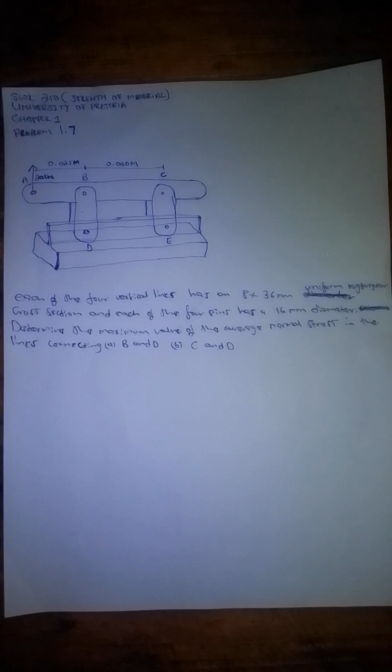Today we're continuing with our SWK 210, which is the strength of material from the University of Pretoria. We continue with our chapter 1, and today we're looking at problem 1.7.

There's a sketch right there, and the question says each of the 4 vertical links has an 8 by 36 millimeter uniform rectangular cross section, and each of the 4 pins has a 16 mm diameter. Now the question is, determine the maximum value of the average normal stress in the links connecting (a) B and D, and (b) C and D. So let me just explain and show you guys the 4 links.

This is the first link, and behind there's actually another link. This structure you see, I call this, like this sort of a beam you see here, it's actually seated between 2 links, exactly the size. One here as you see it, but the one you can't see it, I just drew a line here to show that actually behind it there's another link, so it's seated behind it, and it's actually held together by a pin here, and exactly and that happens again also exactly here.

There's one link here, another one here, and then they are held by a pin. Now what's happening here is exactly also happening here. There's also another sort of a beam here, and it's seated between these 2 links. It's also held by a pin here and by a pin there.

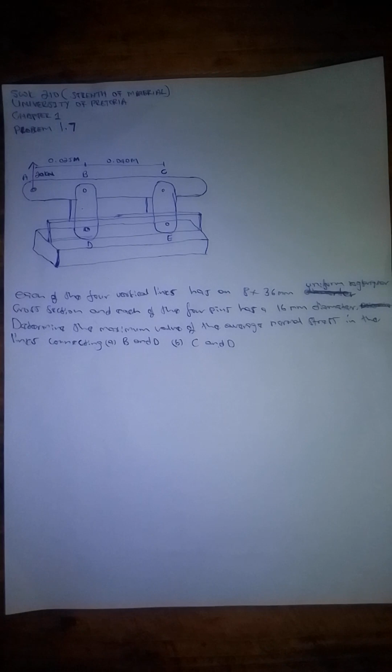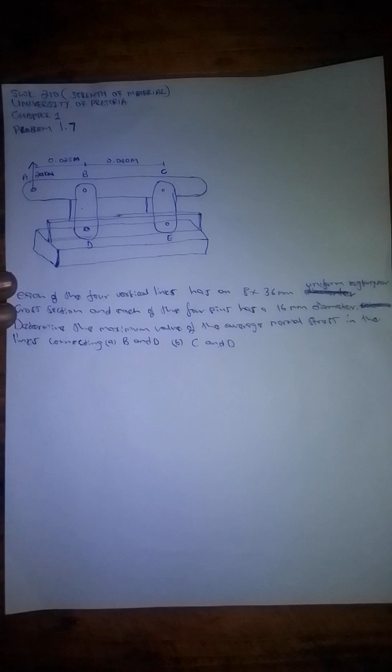So now with that said, they say determine the maximum value of the average normal stress in the links connecting B and D and also connecting C and D. So we're going to calculate the average normal stress in these links, the links connecting B and D. On question A, we're going to calculate the average normal stress in the links connecting B and D. And then in our second question in B, we're going to calculate the average normal stress connecting C and E.

Now, for us to move further from here, we have a structure there. Now we need a free body diagram. So I'll just draw one here. Okay, I forgot to mention here that at this point, there's actually a 20 kilonewton force that is applied upwards at this point. So when we have that, then this will be our 20 kilonewtons.

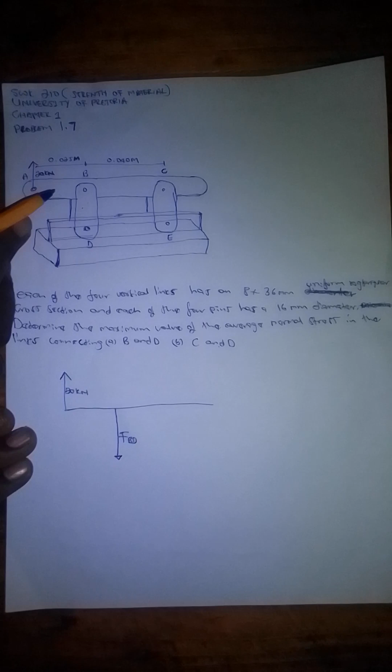And the B and D, I'll just put it like this. I will explain later. So this will be our force in BD. Yeah, this is force in BD because remember, these are held together. When you push here, there will be a force applied here, and also there will be a force applied there. Now with that said, we can just put another force here and say it's force CE. So now we have our 3 forces there.

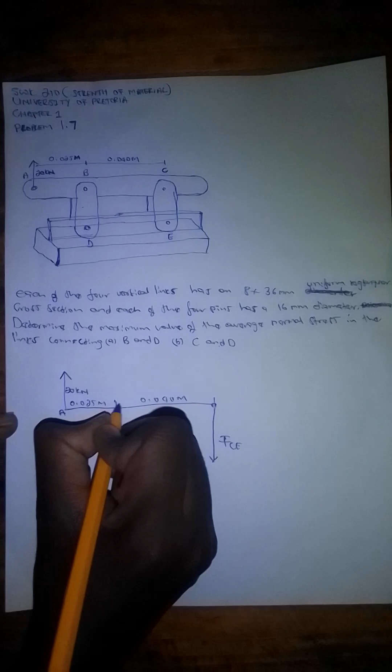Then we just also put the measurements. There's 0.025 meters, so it's gonna be 0.025 meters, right? And from here to there is gonna be 0.040 meters. So that is almost our free body diagram, or let me just name it A, B, and C, right? So yeah, that is basically our free body diagram.

Now when we have our free body diagram in this way, normally, or the easiest approach for us to be able to determine the maximum normal stress, we know we're gonna need the forces, right? If we're going to calculate the average normal stress in BD, we're gonna need FBD, right? So the first thing we're going to be doing now is to calculate FBD.

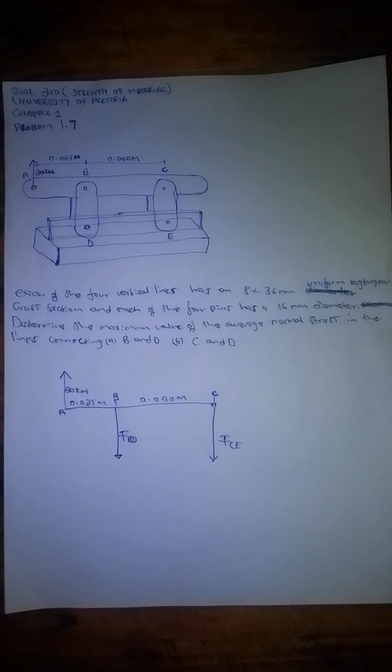And for us to do that, it's easier for us to calculate the sum of all the moments at point C. This is typically, I think it's SWK 122 work, where we know that we have two unknowns. So if we calculate the sum of all the moments here, we're going to eliminate FCE, and we're going to have a known force and an unknown force, and it's going to be easy for us to get that.

So with that said, we can just say, therefore, sum of all the moments at C is equals to 0. Now, if sum of all the moments at C is equals to 0, therefore, BD from here, from B to C is 0.04. So we're just going to say 0.04 multiplied by BD. So it's going to be, and remember, another thing I need to highlight is that if it's anti-clockwise, it's positive, and if it's clockwise, it's negative.

So with that said, from the FBD, if we take the moment by C, it's going to be anti-clockwise, so that makes it positive. So we're going to have 0.04 multiplied by FBD. Now with that said, we also need to calculate the moment of 20 kilonewtons by point C.

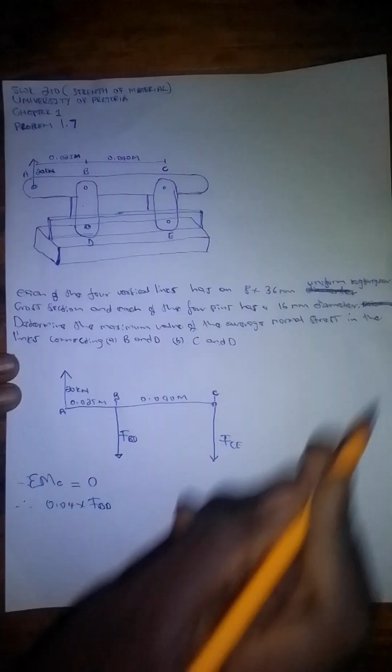Because when you look at the 20 kilonewtons, it's going clockwise, so it's negative. So we're going to say minus 20 times 10 to the power 3, that is the force, multiplied by the total distance, so you can just say 0.025 plus 0.04. And all this is going to be equals to 0.

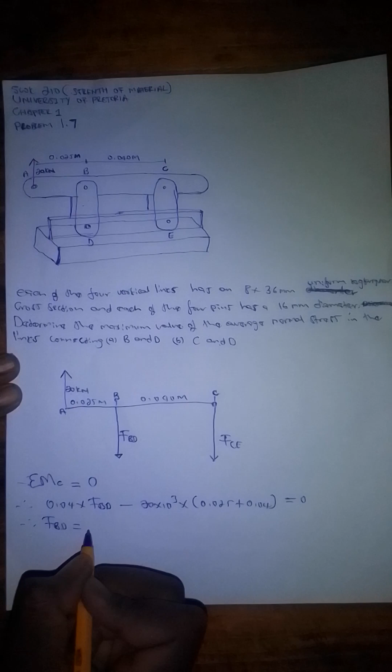Now with that said, there's only one unknown, which is FBD. So if you do your calculations, you'll find that FBD is equal to 32.5 kilonewtons, so that's 32.5 times 10 to the power 3 newtons. So that becomes our FBD.

Now we got our FBD because we took a moment by C to eliminate FCE. But now we need FCE, and to get that easily, we can eliminate FBD by taking the moment by B. We could also take a moment by A, but it will be much more straightforward if we take a moment by B.

So we say the sum of all the moments by B is equal to 0. We can start with the 20 kilonewtons, which from here is going to go clockwise, and that makes it negative. So we're going to have minus 20 times 10 to the power 3 multiplied by the distance from A to B, which is 0.025.

Now do the same with FCE. It's also going clockwise, so we're going to say minus FCE multiplied by the distance from B to C, which is 0.04 meters. So all this is equal to 0, and we only have one unknown. If you do your normal arithmetic simplification, you'll find that FCE is equal to minus 12.5 kilonewtons.

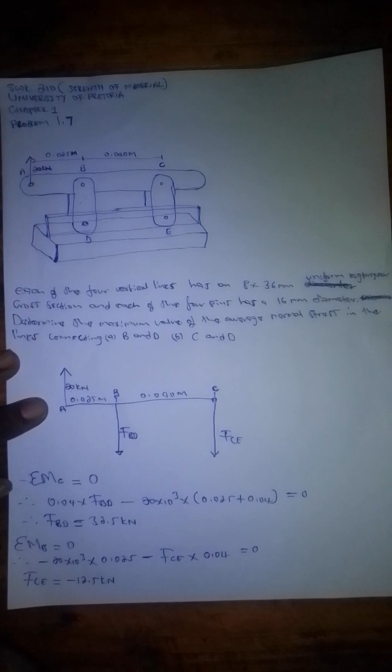Another thing I need to highlight here is that we need to remember these two links can either be in compression or in tension. One thing that tells us whether a link is in compression or tension is the sign of the force. So now FBD is actually positive, and if it's positive, that means link BD is in tension, because the force in BD is actually positive.

So I can even write it here and say FBD is positive, just so that it can be visible. Also now FCE is negative, which tells us that link CE is actually in compression, because of the sign. So I can just say here that link CE is in compression, and FCE is negative.

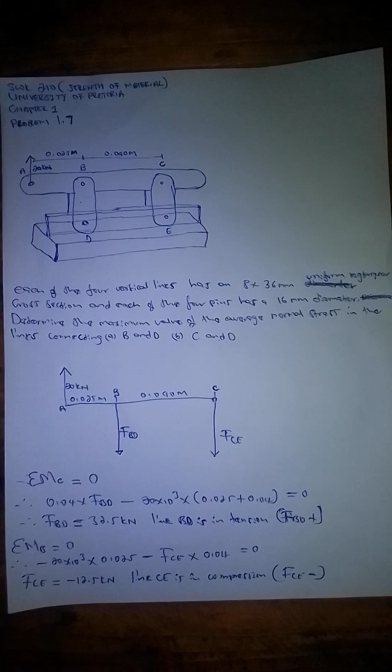So now this is the first part. We are done with the first part of our question where we calculated the forces. Now we are almost halfway there. Remember, the question asks for the average normal stress, and we know the equation of stress is actually force over the cross-sectional area. So now what we need is to calculate the cross-sectional area, which is very important and very interesting, especially the part I'm going to be explaining.

So now we're going to start with link BD and calculate the cross-sectional area. So we can say cross-sectional area of link BD is equal to, I just needed to write that sentence there. I could have easily said area is equal to, but I wanted to write it that way.

Now I need to explain something here. There's a very interesting difference between the cross-sectional area of the link that is in tension and the link that is in compression. So the link that is in tension, let me just write it down and then I'll explain it. We know that's the thickness, and then there's also the length. So we're going to say 0.008 meters, which is the thickness. Remember, we are told that it's actually an 8x36.

Multiplied by. Now instead of using the whole 36 millimeters, we're going to say 0.036 meters minus, this is actually where I need to explain this. Okay, let me just write this properly.

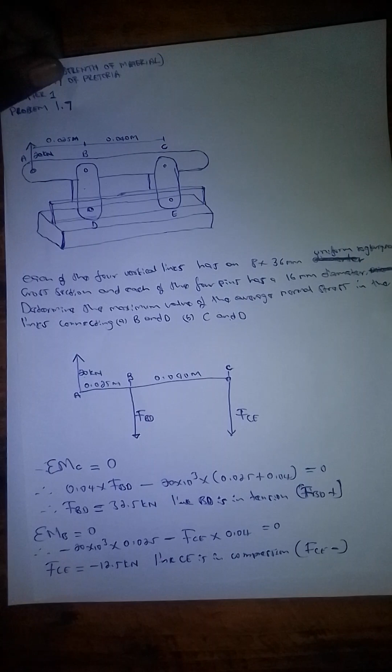Now, when a link is in tension, the cross-sectional area that you're actually using, let me just draw a line here. Remember, the cross-sectional area is the area here. So when a link is in tension, this area that is actually occupied by the link is not counted, which means you get the area from here to here and then jump the hole or the pin from here to there.

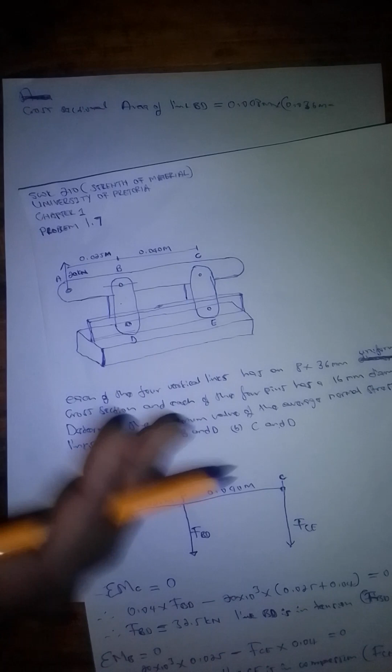This will be clearer when I explain it. When this link is in tension, this pin here is actually pushing upwards, and in pushing upwards... I could easily say when the link is in compression you add this area, and when it's in tension you minus this area. But I'm trying to explain the why part. Why is it that we have to minus that? That's what I'm trying to present to you guys.

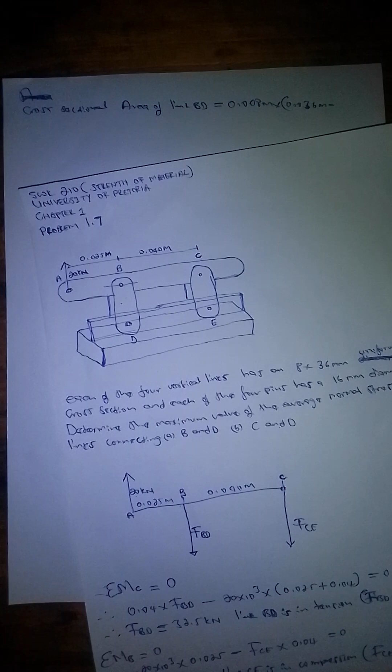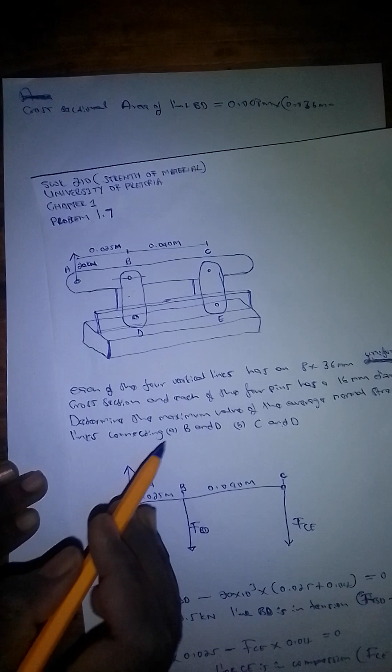This is because practically when this is in tension, the pin is actually moving in that direction. And with that said, only this part and that part is the one that is actually affected. Why? Because remember we are calculating the average normal stress, so the maximum value of the average normal stress, the highest normal stress that this pin in tension can actually take, is the normal stress that this part here can take. I hope that's much clearer.

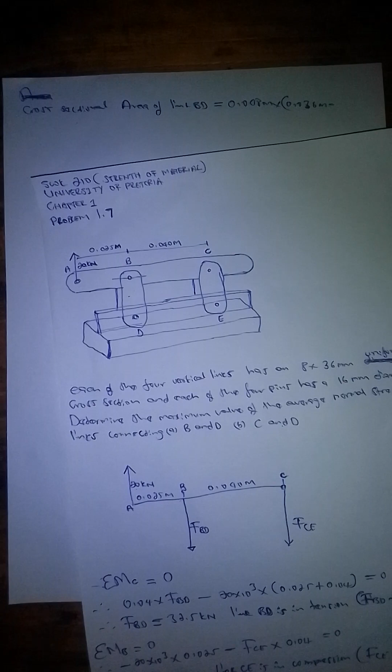This is because if the pin experiences a stress that is actually much higher than this part, it doesn't really matter if this whole part can handle it. As long as it can experience a stress that is higher than this part, then this pin or this link will actually fail. I'll find a much better way of explaining that, but the thing is, when the link is in tension in this case, the area here has to be subtracted.

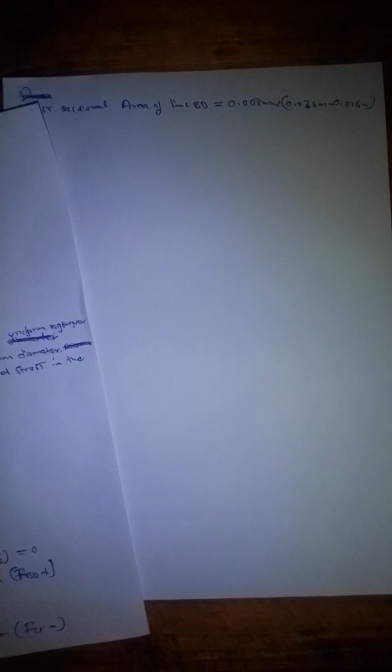Because we know that the diameter of the pin is actually 16 millimeters, we can easily just say minus 0.016 meters. So then that becomes it. And with that said, when you use your calculator, you get 0.00016 meters squared. So yeah, that becomes the cross-sectional area of this pin.

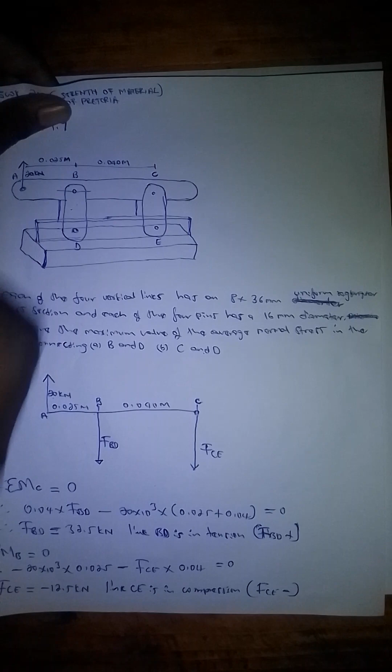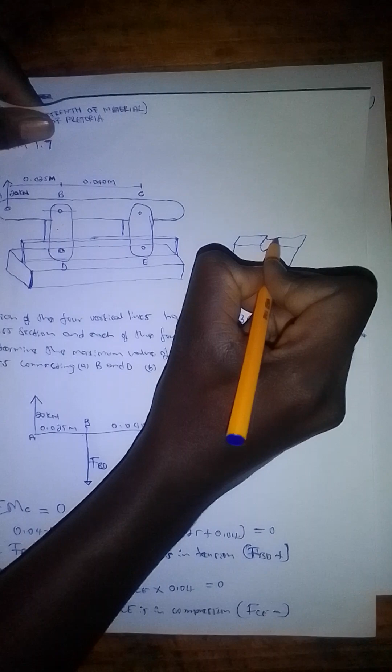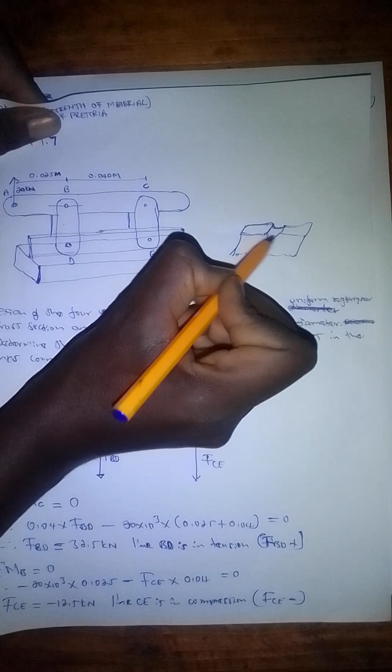Can I just draw it here? Let's say I cut this pin here, right? This is what I'm gonna try to give you like a 3D view. Yeah, this is the pin. So if I cut this pin by half here, I'm gonna be left with this. So the cross-sectional area that is actually being calculated is this area here, excluding the place where there's the pin. And that's why when we calculated the cross-sectional area, we did say 36, and then 8, and then 36 minus this part here, which is the 16. I hope that's much clearer.

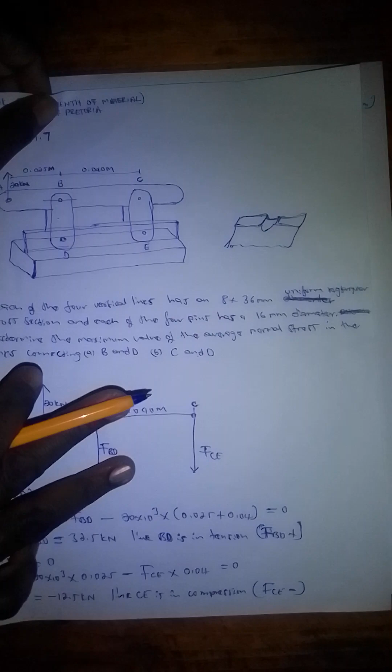But there's more. With time, I'll find a better way of explaining why, because the important thing about this module is knowing the why part of things, not necessarily knowing how to solve it. It's much easier to solve it, but if you know the why part, then the tricky part of this module will actually be much easier.

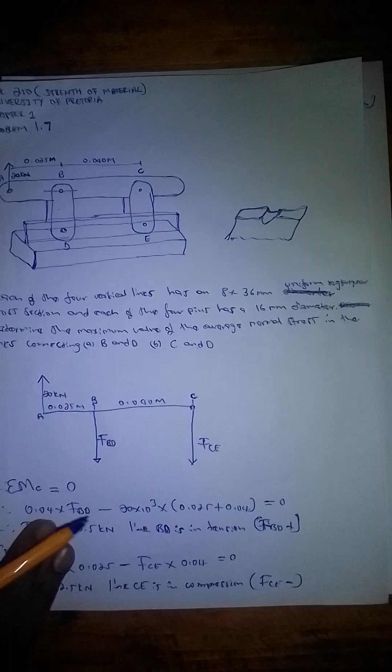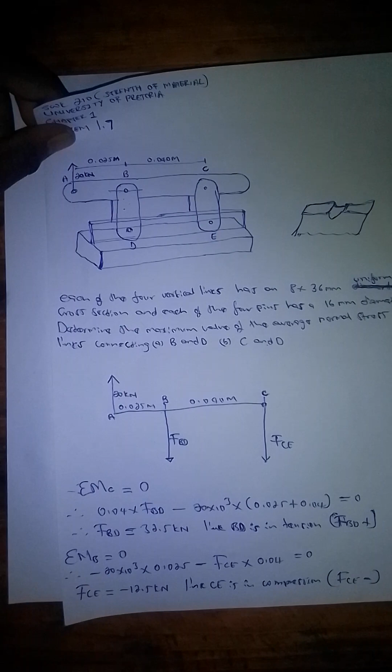So with that said, now when we have that area, remember we calculated that cross-sectional area to be 0.00016 meters squared, but there are two links, this link and the one at the back. The force BD is actually acting upon both links, so the total cross-sectional area that BD is acting on is gonna be twice that. So area for two links is equals to 0.00016 multiplied by 2, which gives 0.00032 meters squared.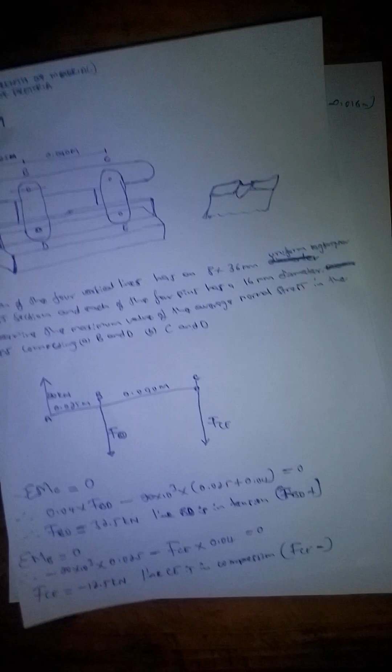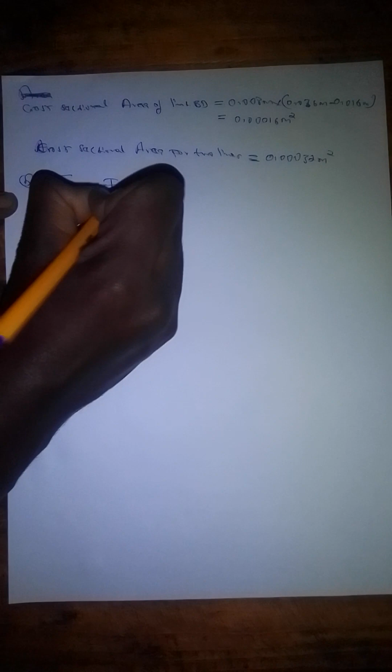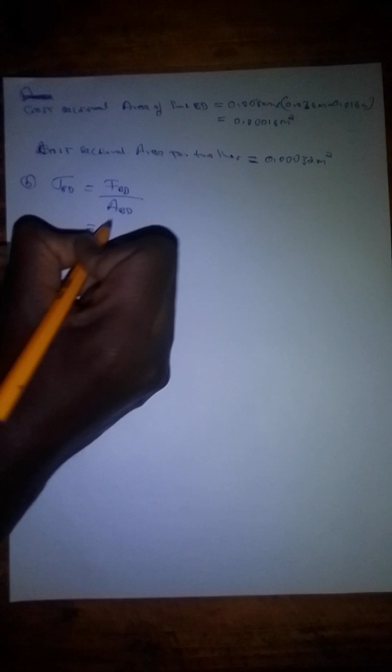Now that we have our cross-sectional area of link BD, which we've already established is in tension, and we have the force BD, we can answer question A: determine the maximum value of the average normal stress in the links connecting B and D. Average stress of BD is equals to FBD all over area of BD. We already calculated the values we need: force BD is equals to 32.5 kilonewtons, so it's 32.5 times 10 to the power 3 newtons, all over the cross-sectional area of link BD, which is 0.00032 meters squared.

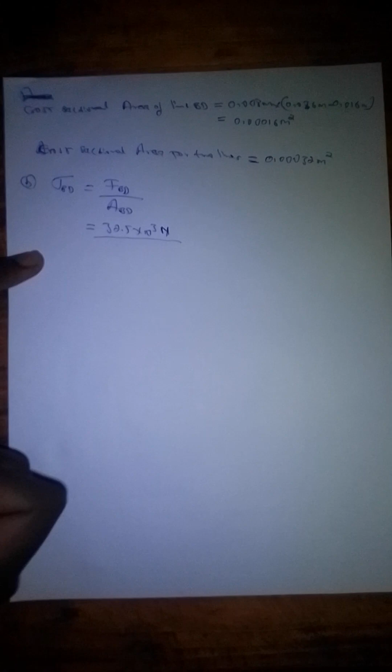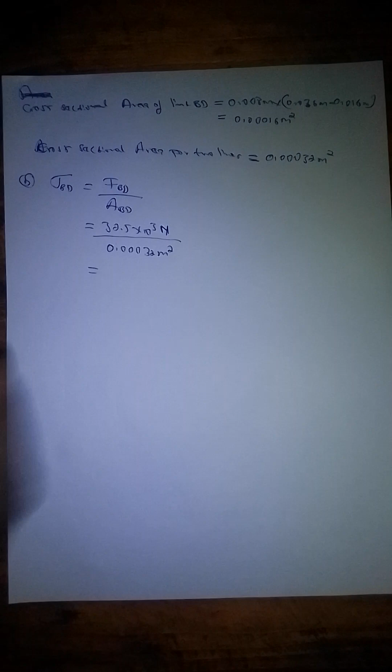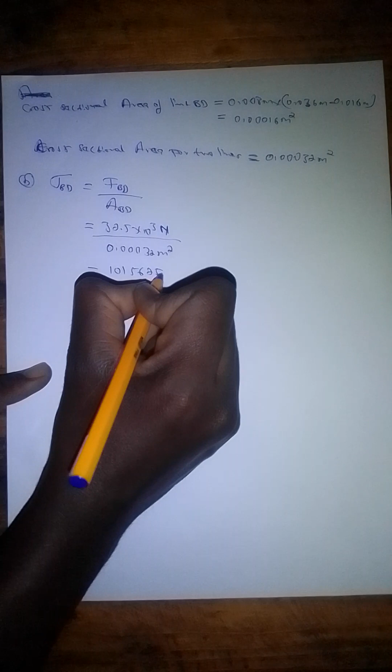Now, if you're going to convert it to megapascals, it's going to be equal to 101.563 megapascals. With that said, we have answered question A of the problem.

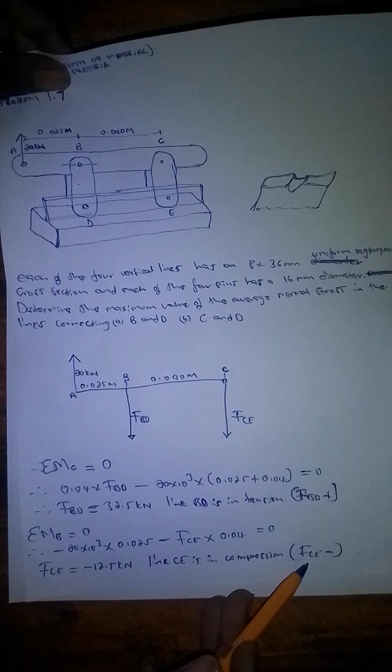So now we're going to question B. Question B is also similar, but now we're going to use the values of CE. Remember, here we only have the force, but we don't have the area, so the first thing we need to calculate is the cross-sectional area of link CE. However, link CE is actually in compression, because we've established that it's negative.

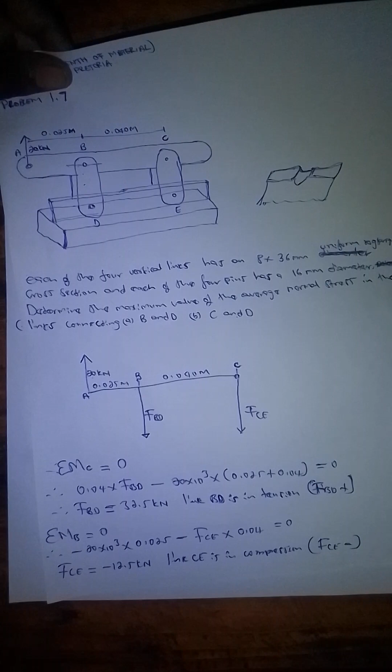Now, when the link is in compression, we use the whole cross-sectional area. So we can say the area of CE is equal to, let me use meters, 0.008 meters multiplied by 0.036 meters. And if you use your calculator, it gives you 0.0000288 meters squared.

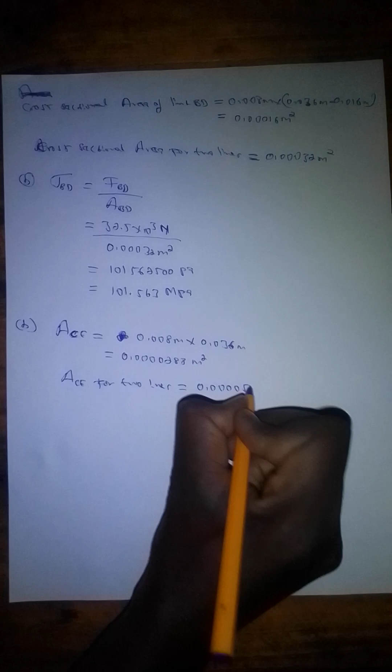However, this is also the same as the first question - this is actually two links: the first cross-sectional area here and the other cross-sectional area of the other link at the other side, because this force is acting on both links. So we can say that the area CE for two links, when you multiply this by 2, gives you 0.0000576 meters squared.

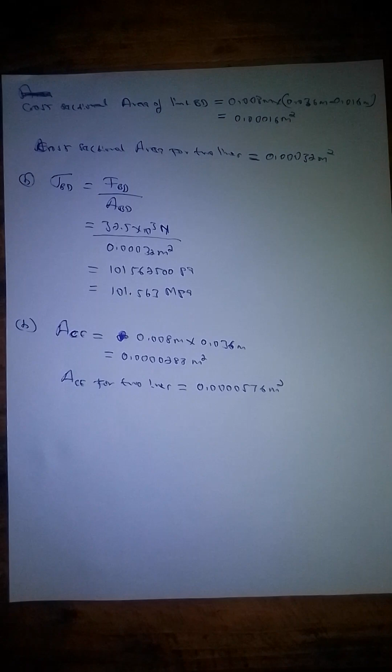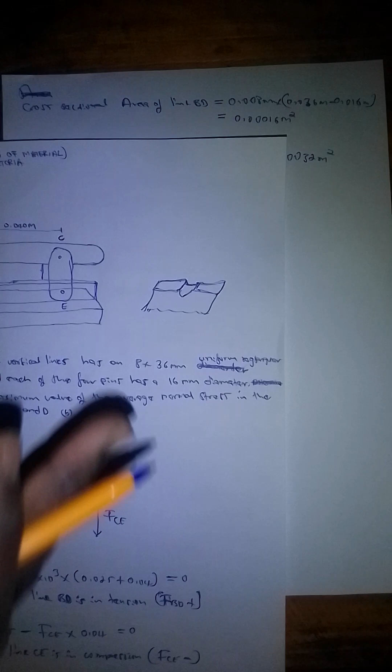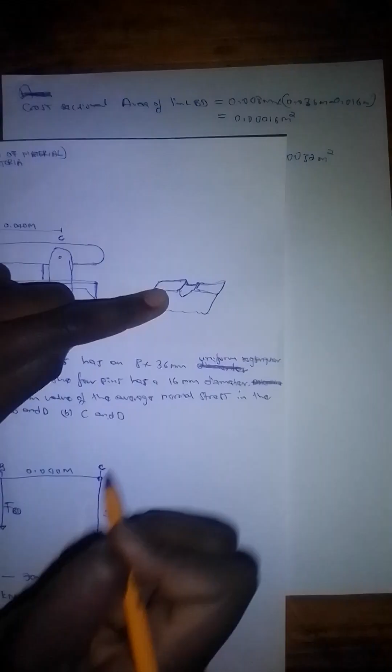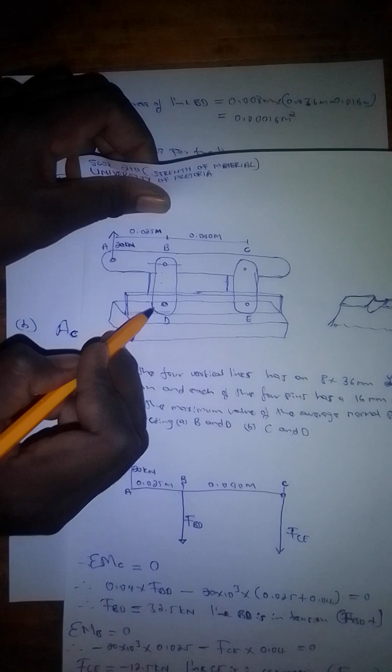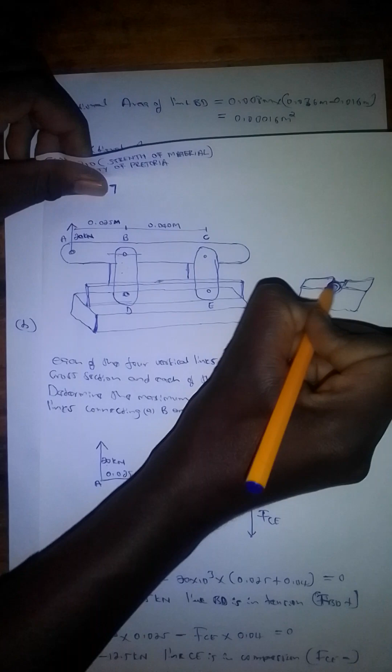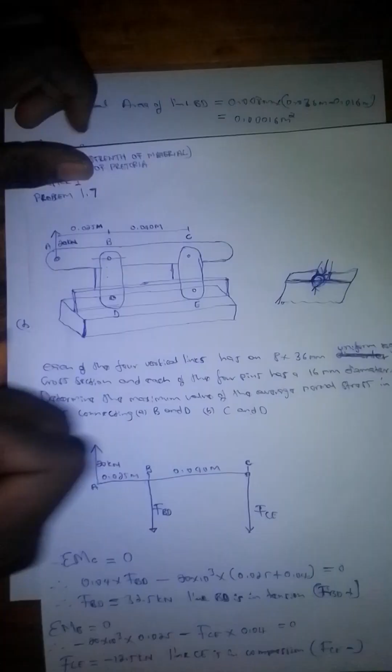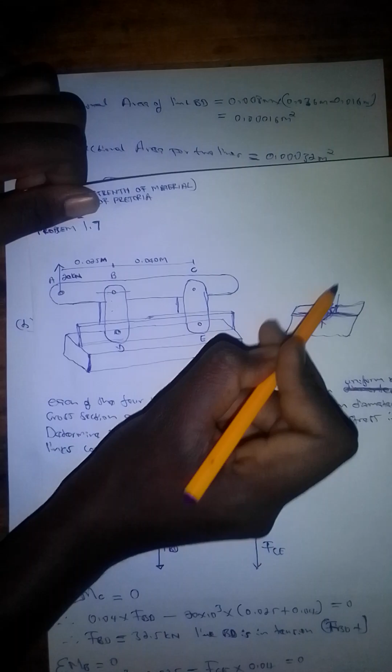However, in compression, when you actually compress this - let me put the pin here. If this is a pin, and you exert some pressure down, there's some force here and some force here too, not just on the link but also on the pin. As such, this whole area here is actually experiencing compression, whereas in the case of BD, only this area was experiencing tension, because the pin here was only held on one side. I hope that makes sense.

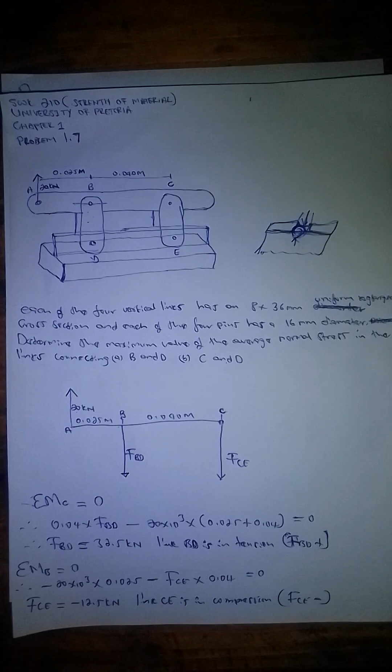This is actually just one of the principles of physics that I believe, with time along this course, will develop. But it's very important, especially because this module is full of tricks in itself. So that's why I always try to emphasize or explain the how part of things, because if you know the how part of things, if in one way or another the module or the question surprises you, you can always find a way through solving that.

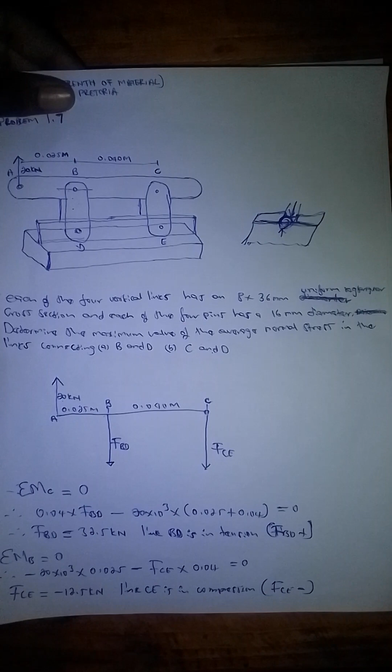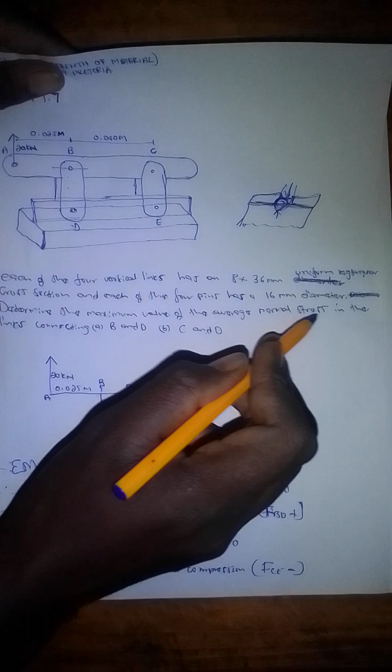So that is it. Now we have established the area of CE, the cross-sectional area of CE. With that said, we can go answer the question: determine the maximum value of the average normal stress in the links connecting C and D. Now that we have all the values, we can simply say the stress of CE is equal to the force CE all over the cross-sectional area of CE.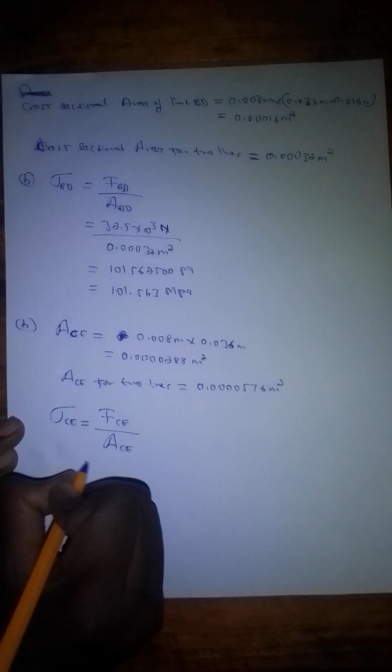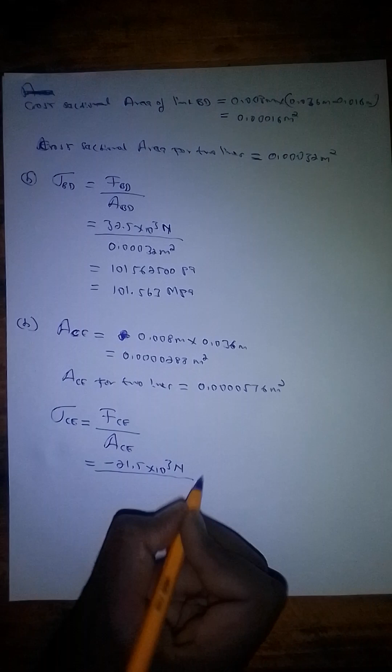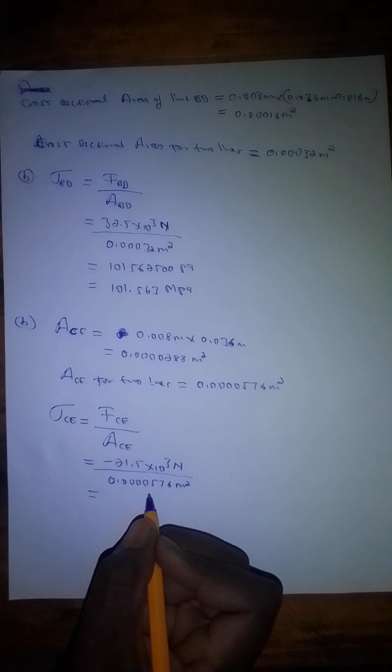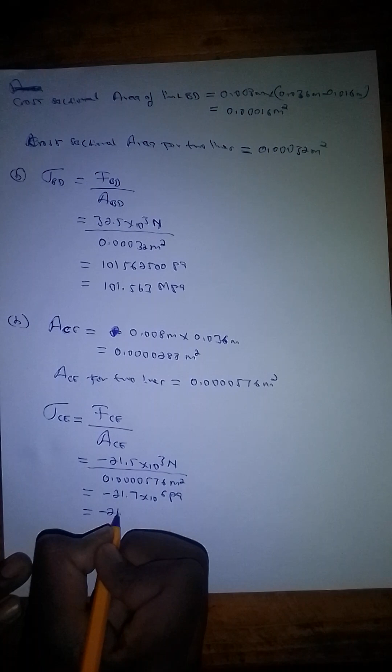We know the force CE is equal to minus 21.5 times 10 to the power 3 newtons, all over the area - the cross-sectional area of CE is 0.000576 meters squared. If you use your calculator, let me just verify here, it should give you minus 21.7 times 10 to the power 6 pascals, and that is equal to minus 21.7 megapascals.

So with that said, this brings us to the end of the question, and I hope I've managed to explain what needs to be explained. I think I've touched enough blind spots in this question, and with time along this module, it will eventually be much easier for everyone to grasp. But I believe by now it's much easier - this is very easy. The challenging part is just finding the area, because if you can't find the correct area, that messes up the whole thing. But if you find the area, everything else that's left becomes only mathematics.